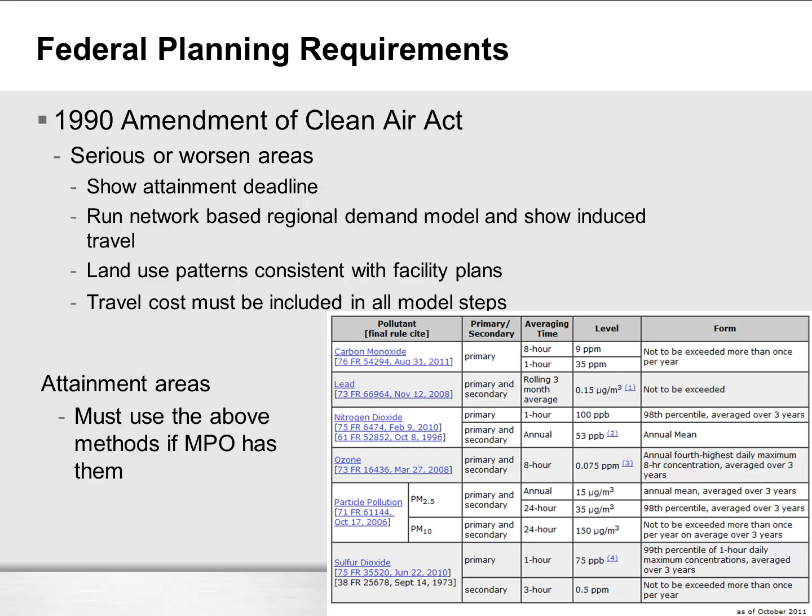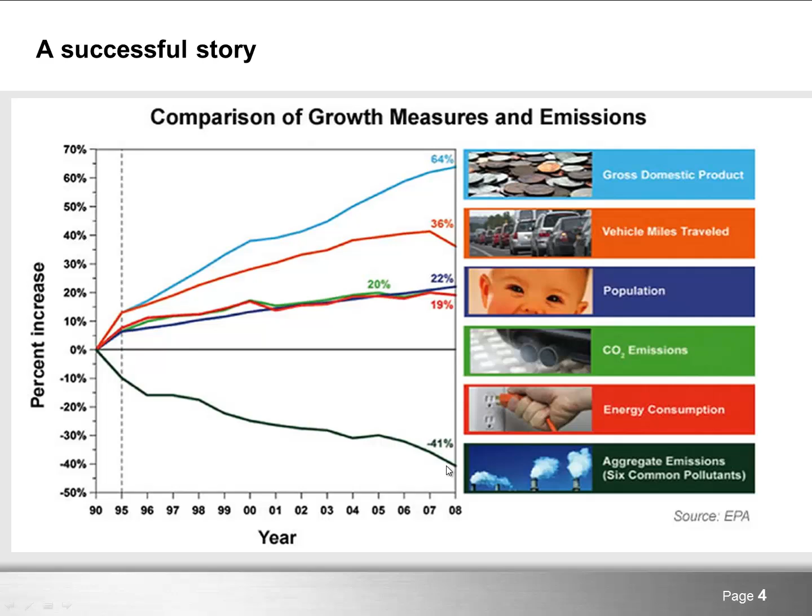And we know that the Intermodal Surface Transportation Efficiency Act, or ISTEA, made in 1991, posed a major change to transportation planning and policy as the first U.S. federal legislation on this subject in the post-interstate highway system era. It requires that the transportation agencies must plan for all travel modes, not only vehicle driving. And MPOs must consult with other agencies and interest groups on scenarios, modeling methods, and indicators. And the planning process must be recertified every 3 years.

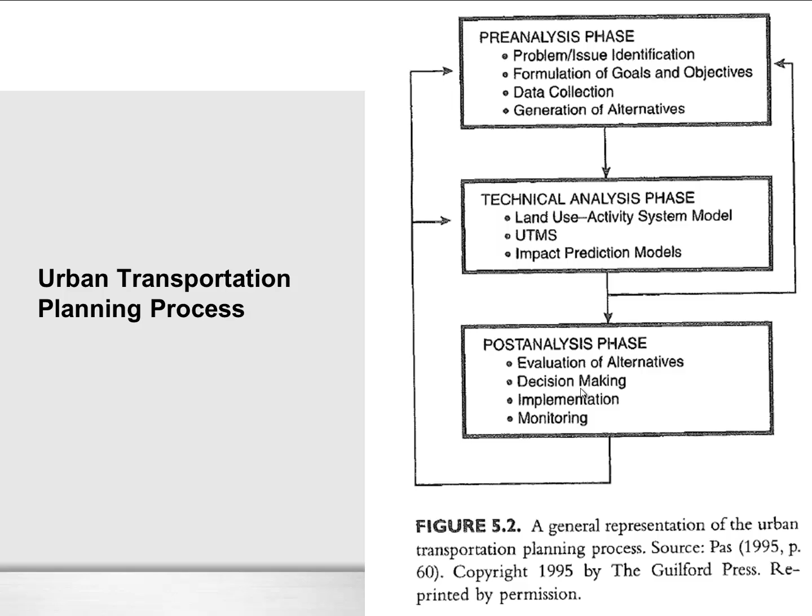Okay, now let's switch gears and talk about the urban transportation planning process. So a general urban transportation planning process includes 3 phases. The first phase is the pre-analysis phase. The second phase is the technical analysis phase, and the third phase is the post-analysis phase. And such a diagram works really well for most medium and large-sized MPOs and for modeling travel and land uses.

The pre-analysis phase includes problem identification, the formulation of objectives, data collection methods, generation of alternatives, and a definition of evaluation measures. The most important aspect of this phase is to define problems broadly and then identify broad objectives. In this way, many solutions can be sought, not just increasing the road capacity. So when formulating the objectives, instead of saying, okay, we'd like to widen the congested roadways, we should say we want to maximize accessibility in the region, especially for lower income households.

The data collection should be carried out every 10 years. Most MPOs carry out their household travel surveys to understand the changing trends and the characteristics of how residents travel in their region. So they do the survey every 10 years. And we also know that we have the decennial census, which provides the changing dynamics of demographics every 10 years.

The generation of alternatives is usually a weak step. In the official plan, the MPOs usually analyze only the preferred plan and a no-action alternative. So there are only 2 alternatives, the preferred plan and a no-action alternative. And the no-action alternative is required by the National Environmental Policy Act.

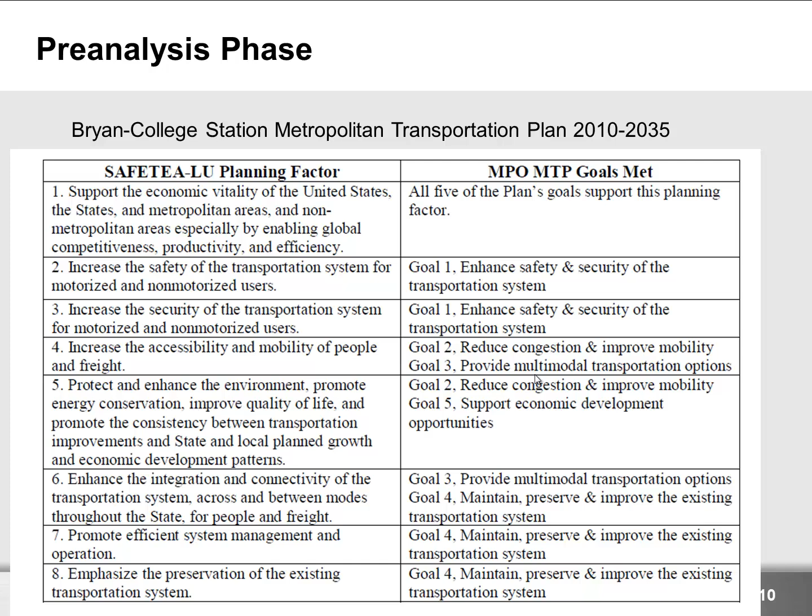The technical analysis phase includes activity forecasts and the 4 steps of modeling: trip generation, trip distribution, mode choice, and traffic assignment. It also includes the emission modeling, which we introduced in the past based on the requirement of the Clean Air Act. The activity forecasts are carried out before running the 4-step model. The MPOs need data about the location of different households and employment for the base year and for the forecast years. The base year data are basically collected from the census, and the forecast data come from the state or federal government input-output models.

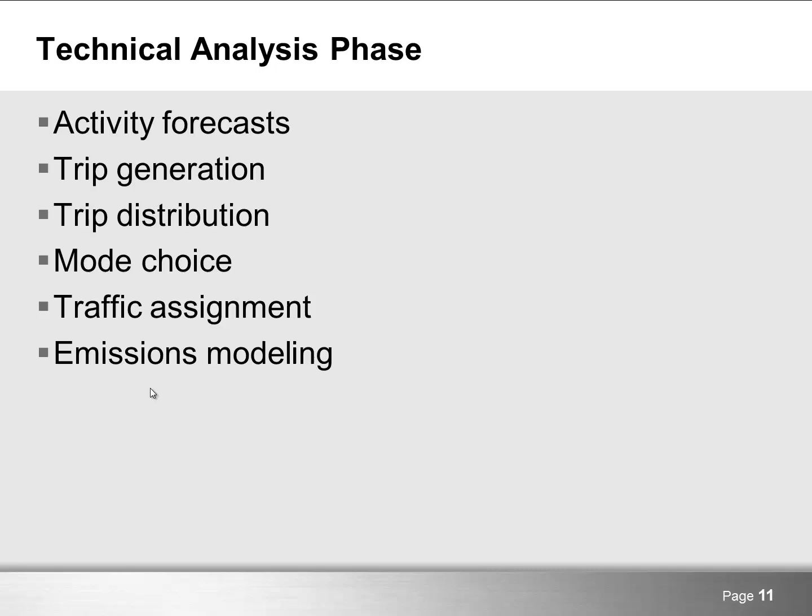So trip generation, trip distribution, mode choice, and traffic assignment, these 4 steps are called the 4-step model, and it is the core of the transportation planning and modeling process. The emission modeling can help the MPOs to translate vehicle volume into emission data. And the MPOs need to use this data to demonstrate that their transportation planning can help them to meet the clean air planning goals. In the next slide, we're going to introduce the core of the technical analysis phase, and this is the 4-step modeling.

It is also called the Urban Transportation Model System, or the UTMS. It began with the travel demand models in the 1950s and then became formalized in the 1960s when the US DOT codified the practice and the software required by this model. As an MPO, they need to understand the transportation system characteristics and land use characteristics in their region. So before they go to the 4-step modeling process, they divide their regions into different zones, called traffic analysis zones. Basically, each MPO can have from 100 to maybe 2,000 zones. And those zones generally are composed of census tracts or census block groups.

So the MPOs need to make 20-year projections of future land uses in small zones throughout the region. And for each small area, the MPO will project the number of households which generate trips and the number of employees which will attract trips. They will also develop a set of networks that represent all the major roads and all transit lines. And trips are assigned to a network of roads that connect the different zones. So after the modeling process, the outputs will be the traffic flows on the network links. That includes the quantity, which is the volume, and also the quality, which is the speed on the network.

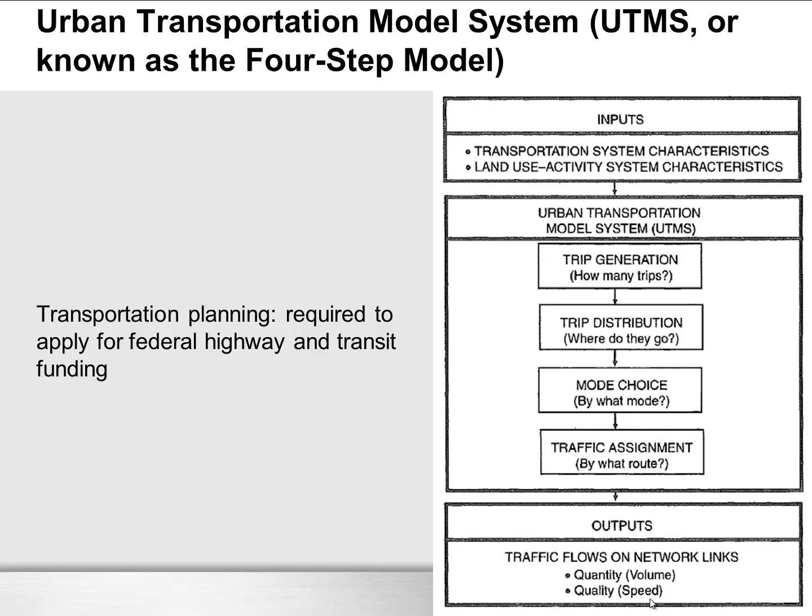When MPOs apply for federal highway and transit funding, they need to demonstrate that their analysis is based on the 4-step modeling process, or the UTMS. The 4-step model is a central part of transportation planning, and it includes the codified methods required at the federal level. So the first step is the trip generation model. In the trip generation model, they analyze household characteristics and they determine the number of trips the household makes per day based on different characteristics such as the income, the size of the household, the number of kids in the household, and so on.

The second step is the trip distribution model. In this process, they will analyze how the trips are generated by the households and attracted by the employment. And the third step is the mode choice model. Basically, they will consider the mode choice as a function of available modes, the household income, and the cost of the mode. A discrete choice model is basically employed for understanding the mode choices in the region. And the fourth step is the route assignment model. Basically, this process will predict how trips are assigned to the networks.

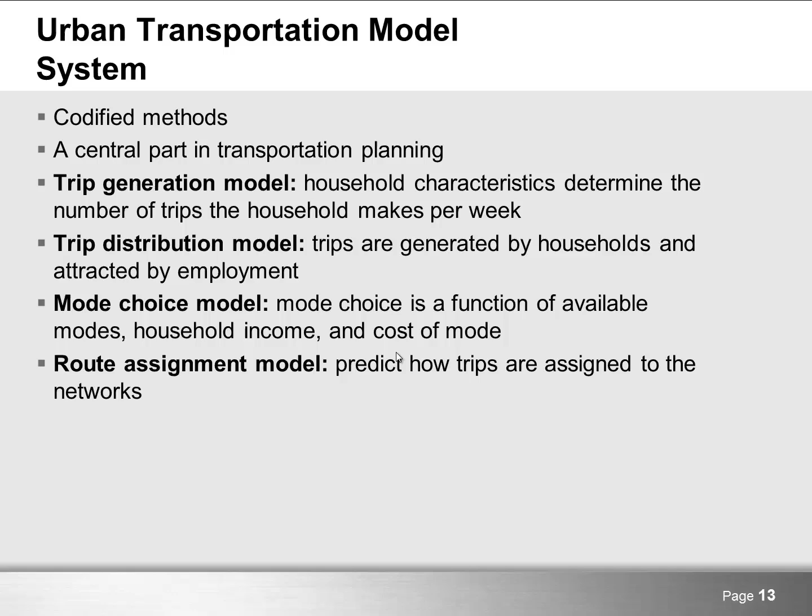When we do analysis, we need to understand the socio-demographic characteristics of this zone, such as the income, the number of vehicles, number of workers, number of jobs, household size, and so on. And we assume that these socio-demographic characteristics will help us to project the number of weekday trips that a household will produce in this zone. So we can understand and project the trips produced from this zone and the trips that are attracted to this zone. So this is the first step.

So after we understand how trips are generated from each zone, we will need to understand how the trips take place from one zone to another. In other words, we need to understand how to match trip origins to trip destinations. And this graph helps us to understand how the trip distribution takes place. So we suppose that the city has three zones right here, zone 1, 2, and 3. And there are certain trips which take place from zone 1 to zone 2 and from zone 1 to zone 3. Also, there are trips that take place between zone 2 and zone 3.

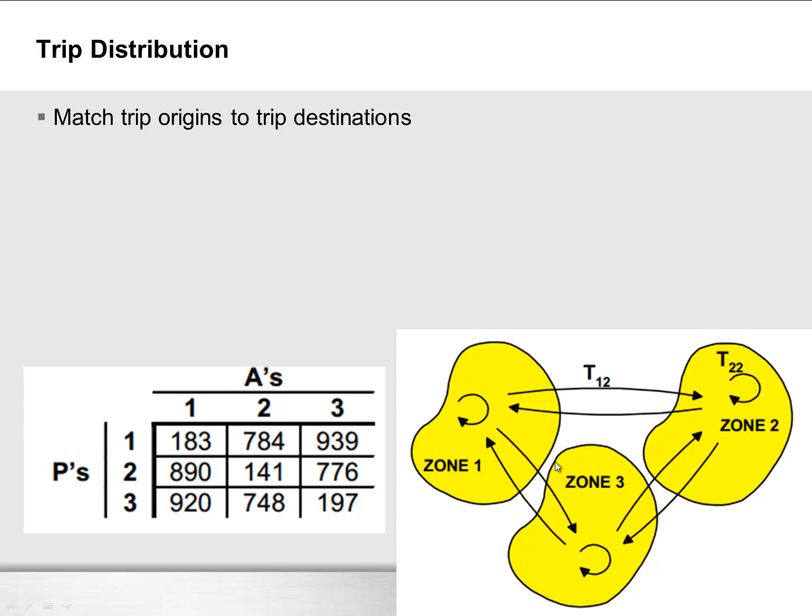There is a large number of trips between pairs of zones when the trip productions in the pair are large, and there is a large number of trips between pairs of zones when the trip attractions in a pair are large, and there is a large number of trips between pairs of zones when there is little separation between the zones. For example, if the two zones are very close to each other, then there is a larger number of trips between this pair of zones. So this is step number 2. It helps us to project where the trip goes within the zone and between different zones.

The third step is the mode choice step. So the mode choice models assume that travelers choose the best mode for themselves by weighing the characteristics of the trips for all available modes. And this graph shows that in order to travel from this zone to this zone, automobile, train, and airlines are all available. As a traveler, you will make your choice based on your characteristics such as your income, your valuation of time, and based on the availability of different modes.

A commonly used method in this mode choice modeling process is to utilize discrete choice modeling. So discrete choice modeling is a method that can predict the probability of choosing a certain mode based on the characteristics of the traveler and availability of different modes.

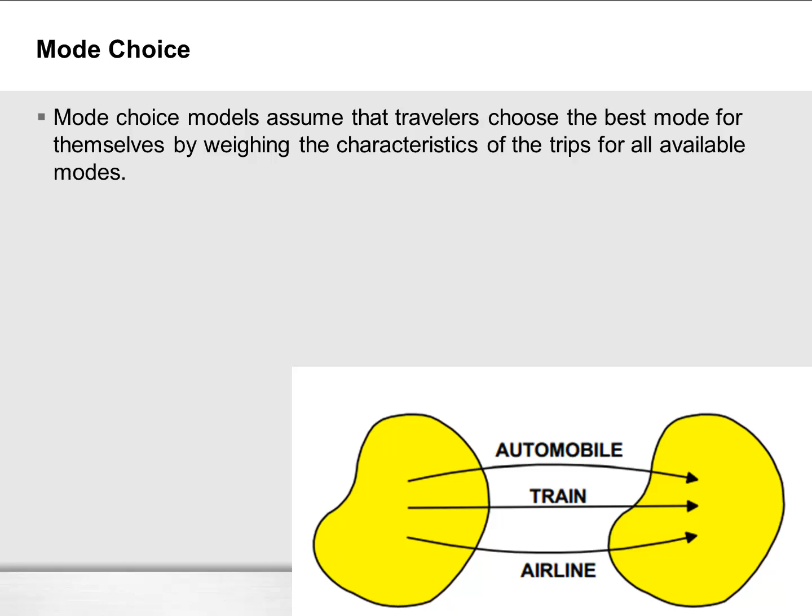The final step in the four-step modeling process is called traffic assignment or route assignment. So basically in this step, a modeler will need to assign the trips along the street or public transit network. And such assignment is chosen so that the travel time is minimized in this network. Because between point A and point B on a certain network, there are different routes. There are some short paths and there are some longer paths.

When a lot of trips are assigned to a similar path, then the travel speed may be slowed down. So in that case, we will need to choose some different path. So under the constraint of the total network capacity, we can achieve equilibrium so that the travel time is minimized. So the above is the 4-step modeling process.

If you're interested in the technical aspect of transportation planning, I would encourage you to choose the course offered at Texas A&M University, and that course is called Transportation System Analysis. And that course focuses on how to carry out the 4-step modeling.

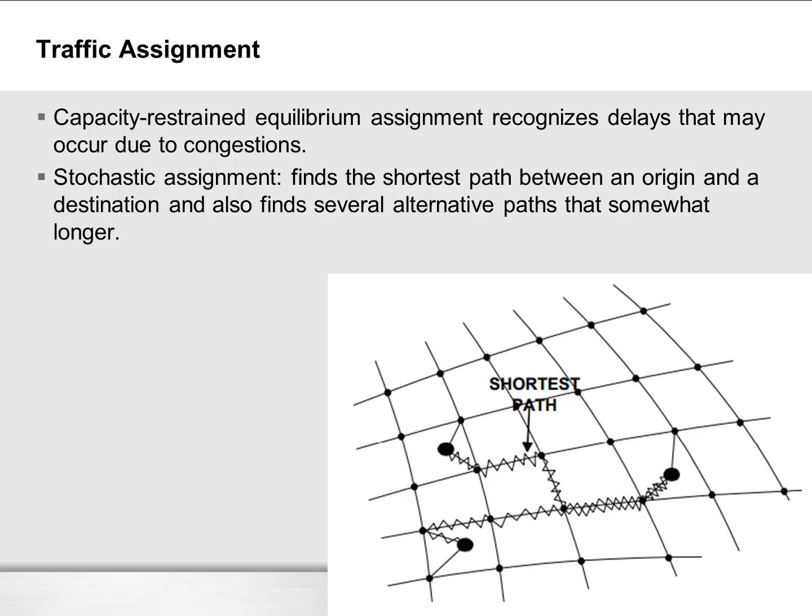In the 1950s and 1960s, the problem for transportation modeling was pretty simple. It was about where to provide new freeways and highways. As transportation professionals, their job was to determine the most congested corridors. They only needed trip distribution and route assignment models, and the results from those trip distribution and route assignment models just had to be roughly right. Trip generation and mode choice did not need to be very accurate.

And right now, partly due to the advancement in computing, more MPOs use these disaggregate discrete choice models for mode choice. Larger cities which have bus lines and railway systems increasingly use these disaggregate discrete choice models to understand how residents make choices among different modes and how the trips are assigned to their network. But smaller cities usually do not use these disaggregate models because there aren't many different modes for residents to choose. Driving is pretty much the dominant mode of transportation.

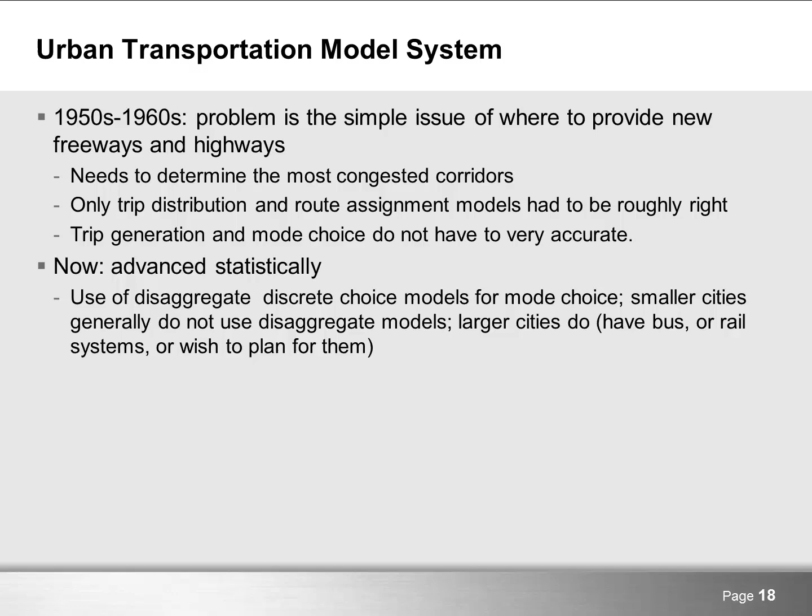Land use and transportation are very closely related to each other, and this graph shows the land market and the transportation market. As we can see here, the interaction between transportation and land use lies in that improvement of transportation will increase the accessibility of certain areas, and that will induce land development in that area. And land development and increased population density and employment density will also call for increased investment in transportation. According to a study by Rodier et al. in 2001, land use effects contributed about 15% to the vehicle miles traveled difference between the no-build and maximum freeway expansion scenarios.

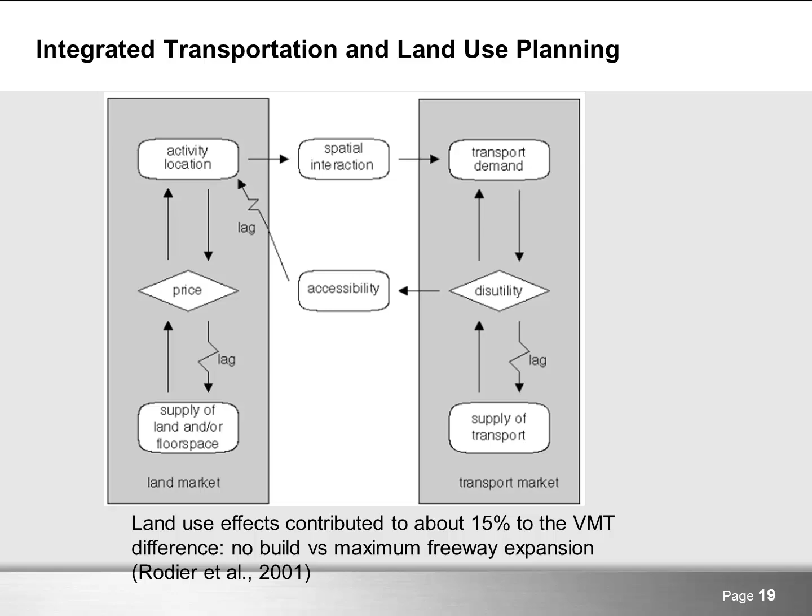MPOs across the country have increasingly integrated land use and transportation. For example, the MPO in Portland, Oregon found that if they use land use models, their results from the travel model are more reasonable in terms of economic theory and common sense. Integrated models sometimes generate significantly lower congestion levels because firms will choose to move outward to take advantage of the less congested conditions. In other words, if we only focus on four-step modeling without consideration of land use, our model may produce exaggerated projections of congestion.

The third phase in urban transportation planning is the post-analysis phase, and this phase includes plan evaluation, plan implementation, and monitoring of results. There are four major evaluation measures: effectiveness, efficiency, equity, and environmental. Effectiveness is about how the transportation system meets its intended objectives. Efficiency is about how much a transportation investment costs in relation to the benefits it provides. Equity is about the fairness with which benefits are delivered and costs are imposed on the many communities in society, and environmental deals with how the projects and the plan consider on-road emissions and energy consumption. But recently, the environmental perspective has broadened to include water runoff from transportation infrastructure and also habitat damage and impacts from the proposed transportation projects.

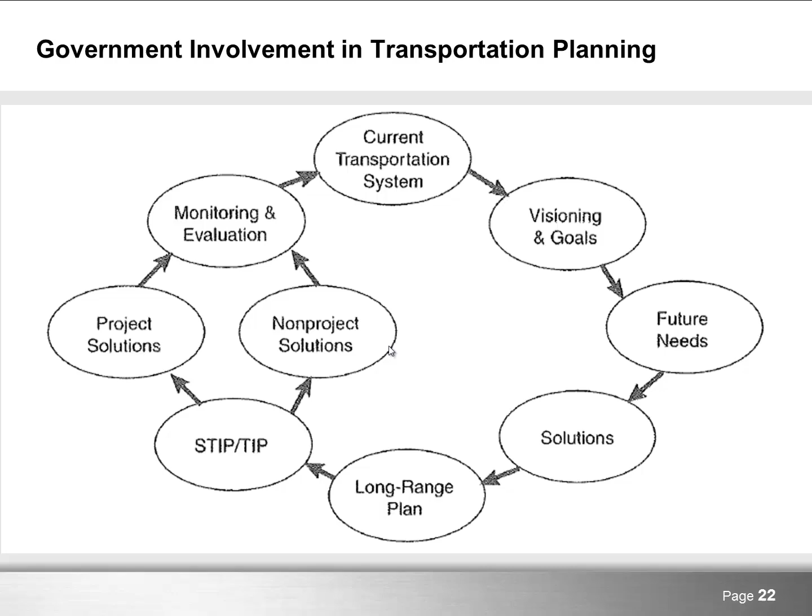In the next few slides, we are going to focus on the core functions of the MPOs, or Metropolitan Planning Organizations. So the MPOs establish and manage a fair and impartial setting for effective regional decision making in the metropolitan area. The MPO identifies and evaluates alternative transportation improvement options. They use data and planning methods to generate and evaluate different alternatives.

So they perform the planning studies and evaluations as part of the UPWP, or the Unified Planning Work Program. In addition, they prepare and maintain a Metropolitan Transportation Plan, or the MTP. So the MPO develops and updates a long-range transportation plan for the metropolitan area, covering a planning horizon of at least 20 years.

And that plan forecasts the mobility and access for people and goods. The plan fosters efficient system performance and preservation, and the plan should also foster a good quality of life. So that is the Metropolitan Transportation Plan, a long-range plan of at least 20 years.